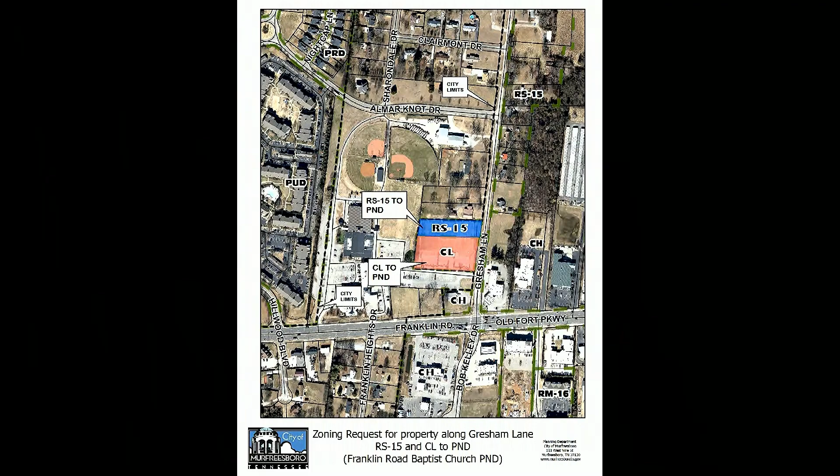Exceptions must be specifically identified and requested in the application for a planned development. The PND program book identifies 6 requested exemptions, including a light spillage exception on the north property line. This request is to allow light spillage into the residential property located to the north, which is in the unincorporated county currently. This property is owned by Franklin Road Baptist Church and is currently used for staff housing.

The north property line buffer requirement exception is requested to supersede the landscape screening and buffering requirements along the north property line that were established as a condition of the 2019 Board of Zoning Appeals special use permit. Franklin Road Baptist Church has purchased the property to the north and will be incorporating it as part of its campus.

A re-subdivision plat timing exception is requested to modify the BZA special use permit condition requiring recordation of a re-subdivision plat prior to the soccer field development. The applicant proposes to record the plat following the effective date of this rezoning request, if approved.

The lighting and amplification exception is requested to supersede the special use permit condition by the BZA prohibiting lighting and outdoor amplified sound at the soccer field. Approval of this rezoning would permit permanent field lighting and amplified sound.

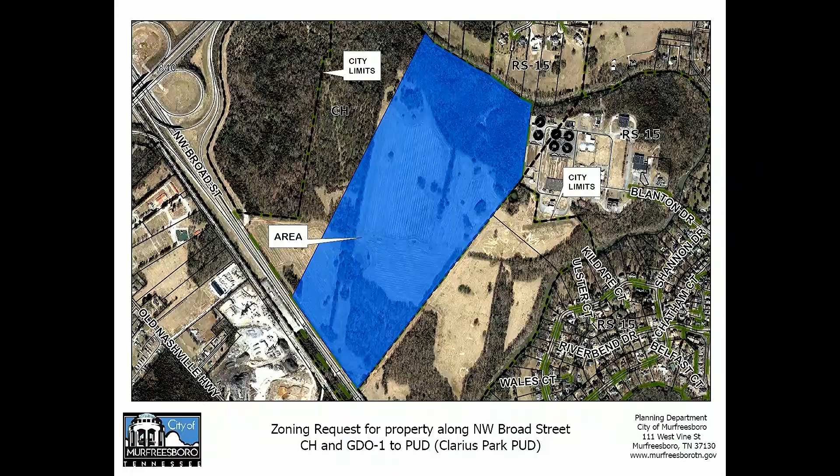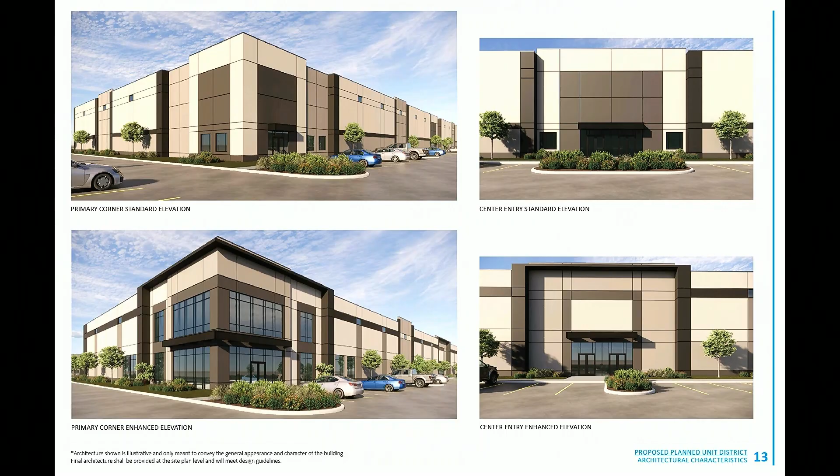Architectural standards are designed as shown here—it's tilt-up panel construction with glass at entry points and corners to help accent. The tilt-up panels will be of varying colors to break up the solid facade, and they also provide some offsets to create interest as required by our design guidelines.

Parking is provided on site. They don't have exact end users yet, so they've estimated to the best of their ability how many parking spaces will be necessary for this development, and have future plans of how they can expand parking if necessary by utilizing spaces on the existing property.

Our future land use map identifies this property as EG, employment generating. Let's see if I can get back to that map. There we go—as you can see, most of that property along Northwest Broad Street at that interchange is in the EG district.

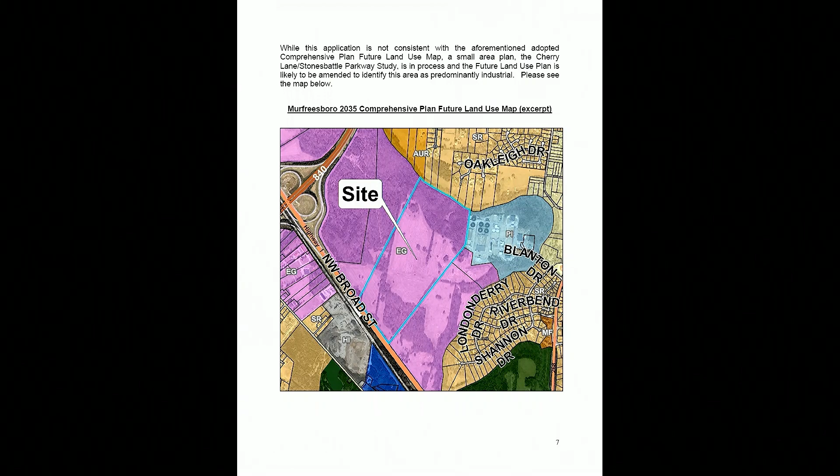While this application is not consistent with the current future land use map, a small area plan called the Cherry Lane Stonesbattle Parkway Study Area is currently in process, and the future land use map is likely to be amended to identify this area as predominantly industrial as a result of that study. So that area you're seeing here would most likely change to an industrial classification.

Staff is supportive of the zoning request for the following reasons. Again, while this application is not consistent with the current future land use map, the Cherry Lane Stonesbattle Parkway study is in process and is expected to identify this area as industrial use in the future. Also, the plan proposes an exceptional transition and buffer area adjacent to the residential use areas along the northern property line. This transition and buffer ranges between 600 and 800 feet from the nearest buildings to the residential property lines. Therefore, staff believes the plan is designed to be compatible with those adjacent residential uses.

The applicant will need to make a presentation as well tonight. After he is completed, the Planning Commission will need to conduct a public hearing before formulating a recommendation for our City Council. I believe Mr. Brian Grover is right here. Any questions for Mr. Barbie at this point? Okay, thank you.

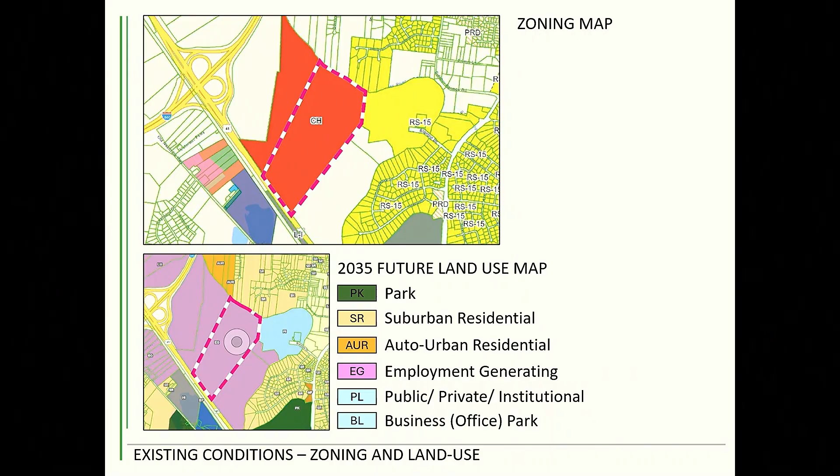As Mr. Barbie stated, this does not follow the current future land use map. However, upon further study that staff has been reviewing with the Cherry Lane Master Plan, industrial uses are being proposed for this section of Murfreesboro.

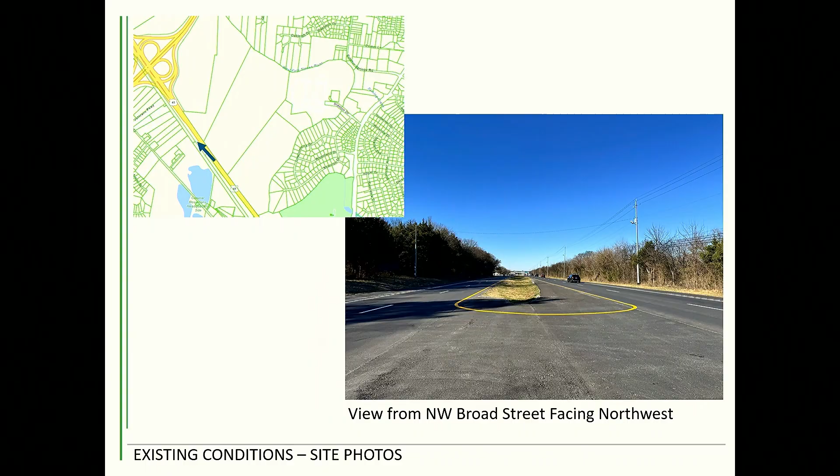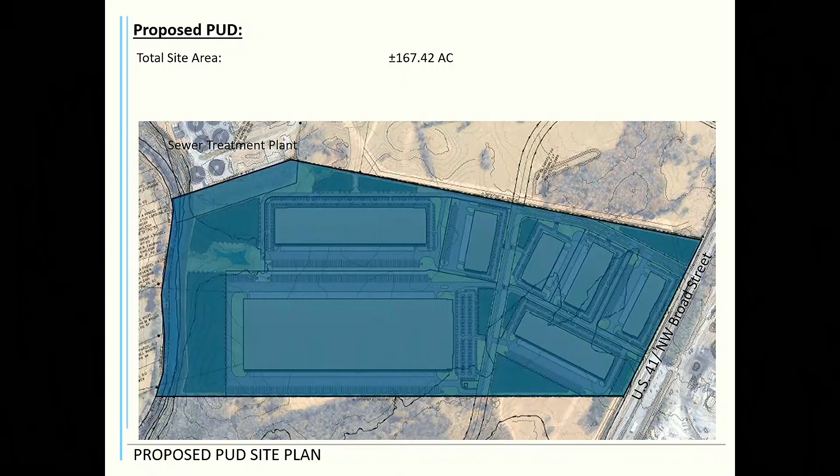The proposed PUD consists of approximately 167.5 acres, of which 5 would be donated towards the sewer treatment plant for their future expansion needs, as well as a little over 7 acres being dedicated towards internal right-of-way, leaving approximately 155 acres for the development.

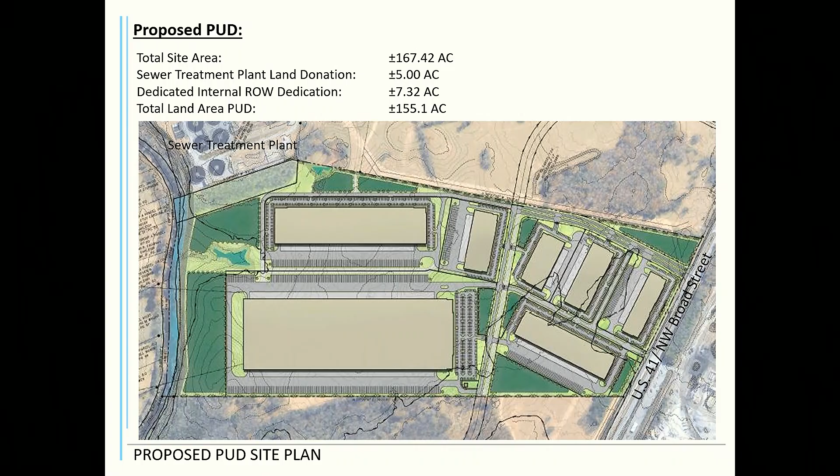The site would be accessed from 41 via two entrances. There is also a proposed 100-foot right-of-way for the east and western connection, which also has a connection going to 41 along the eastern portion of the property.

The property consists of 7 lots, which would house those 7 buildings, having a maximum square footage for the development around 2.1 million square feet.

The parking and trailer storage areas are around the site. On the northern portion of the site, the primary location of the trailer storage is located internally. That was upon discussions with the neighbors at the neighborhood meeting, who wanted to make sure that portion of the site would be internalized.

To mitigate any type of impact to the surrounding area, the southern portion of the development focuses the buildings towards the entryways and frontage along Broad Street to really address the streets.

The open space areas located in green here will also be housing the detention, which is those darker areas. The open space areas will also have the wetlands currently located on site, as well as the tree preservation area located along the Stones River.

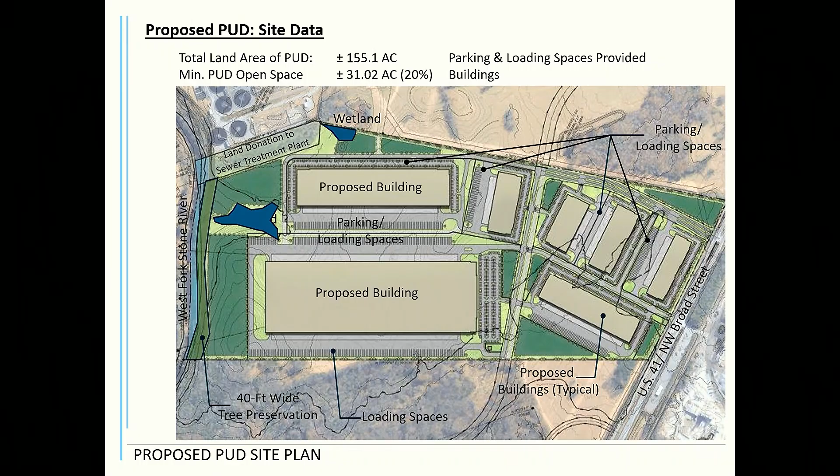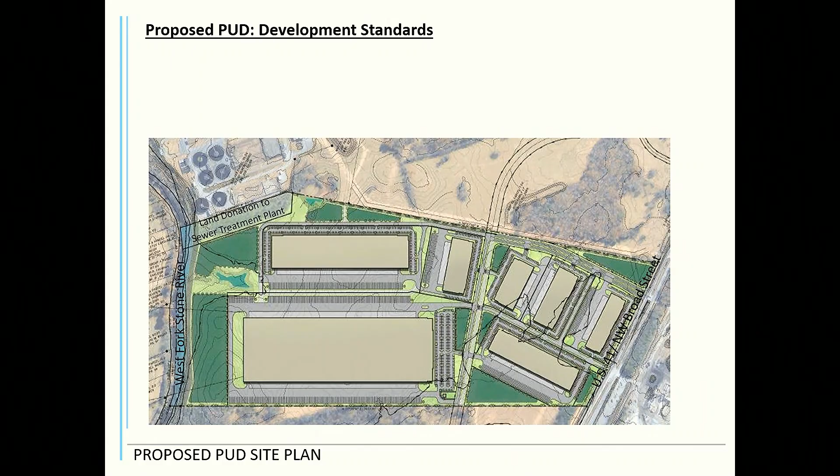Some key standards with this development, although not all of them: the trailer parking areas will be screened from Northwest Broad Street. All the entry points into the development, as well as internal intersections, will ensure proper turning and maneuvering throughout the site.

The development will be providing landscape buffers along the northern and southern portions. We'll also be providing enhanced landscaping along US 41 to help build up that curb appeal, as this is more of an entryway into Murfreesboro, either from 41 or off of 840.

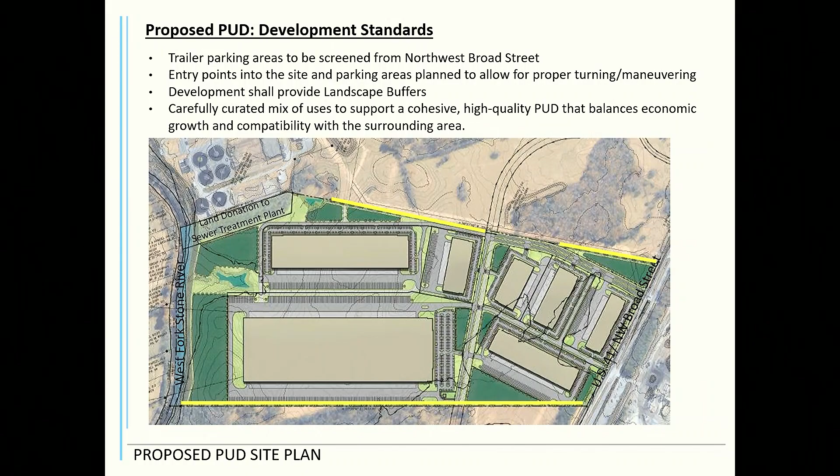Working with staff and some of the stakeholders, such as neighbors, we have developed this proposed use list that we still think will offer economic opportunities throughout Murfreesboro, as well as being compatible with the surrounding area.

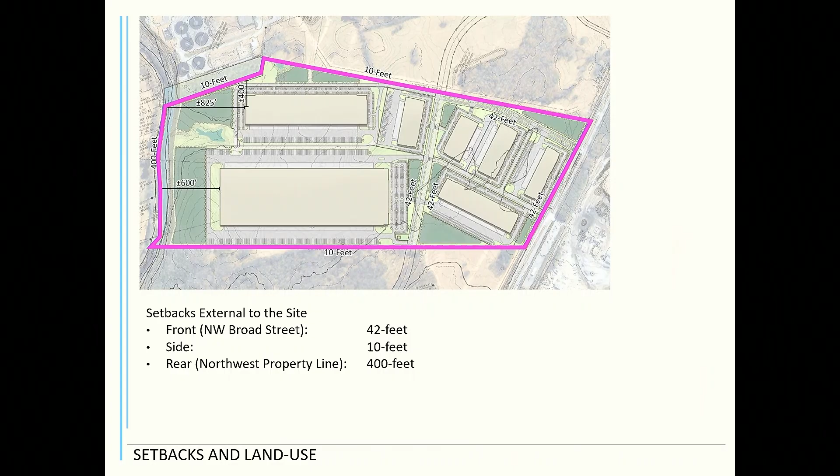When it comes to the setbacks for the site, the external setbacks along Northwest Broad Street would be 42 feet, with the sides being 10. However, the rear would be 400, which is significantly more than what we typically have for setbacks, but we want to make sure we have that separation from those residential units to the north.

The interior setbacks from the proposed right-of-ways would be 42 feet, and the proposed setbacks from the internal lot lines would be 42 from the front, as we do have some shared access areas on site, such as here, which would have that 42 feet, with 10 on the side and 20 on the rear.

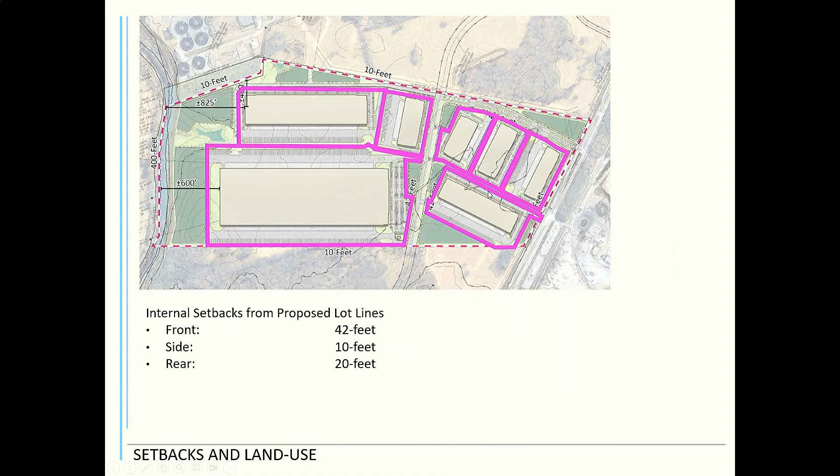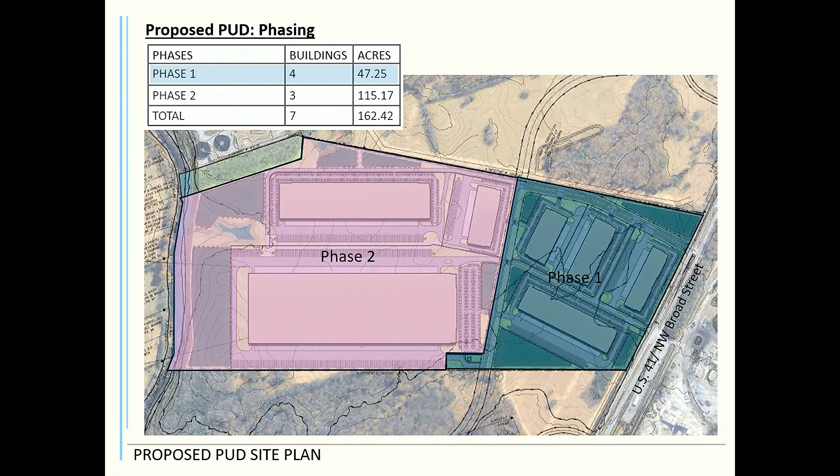This development will be built in 2 phases, with phase 1 consisting of 4 buildings and just under 50 acres, with the remainder being built in phase 2.

With phase 1, there are some infrastructure improvements being built along with this first portion, including a proposed pump station, as well as roadway improvements.

A traffic impact study has been completed, and you can find that on page 16 of the plan book. To summarize what that recommended: the southern entrance along Northwest Broad Street would be a signalized entrance with turn lanes both north and southbound along 41.

The traffic impact study also took into consideration future development. Although these turn lanes would not be technically warranted with our development, they would be warranted in the future at some point. So rather than having dedicated right-of-way figured out later on, we wanted to include that within the dedication for right-of-way now, so those improvements could be made by others as they're warranted later down the road.

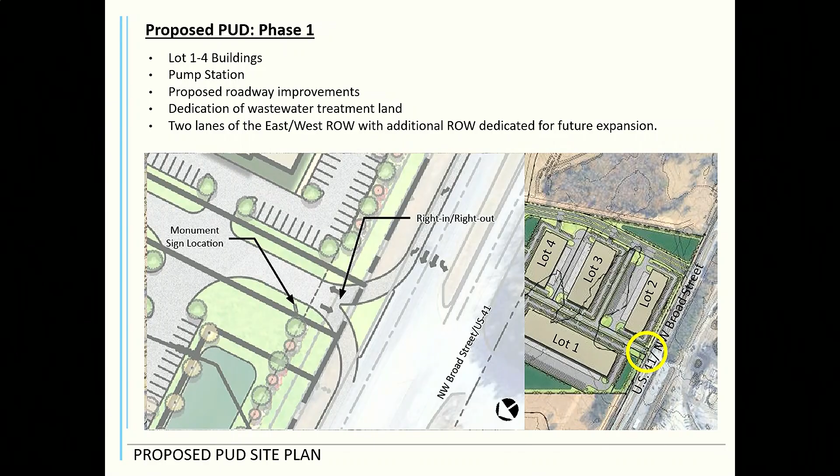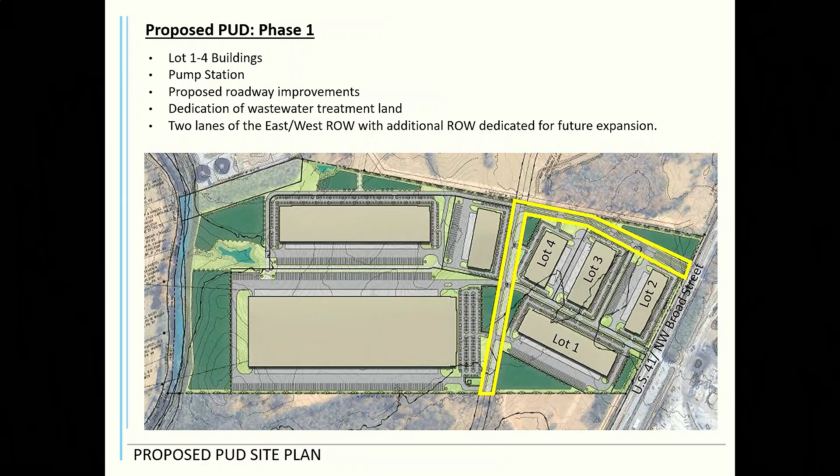The northern entrance would be a right in and right out, and would include a dedicated right turn lane when northbound on US 41. With phase 1, we also have that dedication for the wastewater area, as well as the right-of-way. With this right-of-way on the north to the east-west connection, we would also be providing 2 lanes within that 100-foot right-of-way. The buildings would not exceed 75 feet in height.

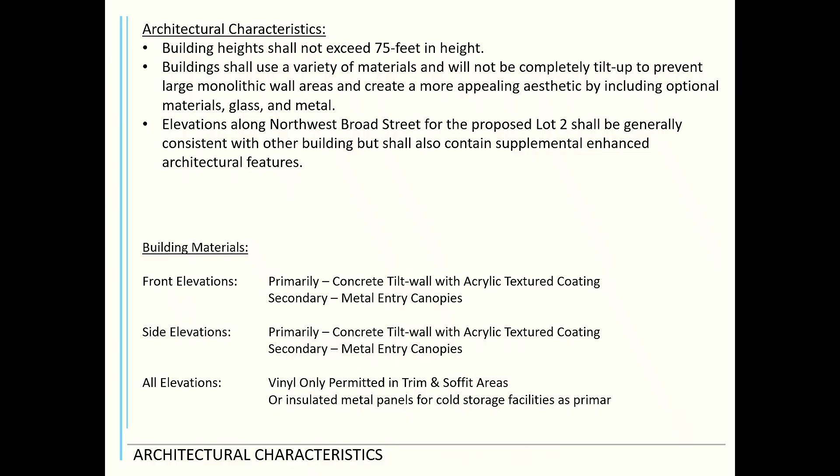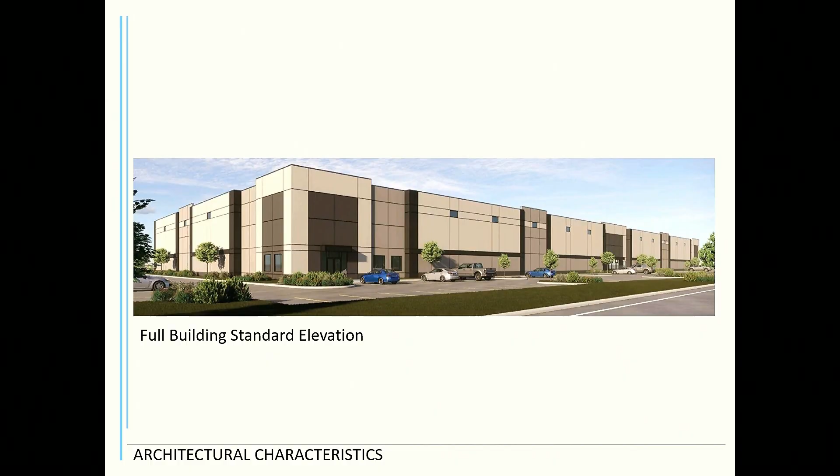They would be using a variety of materials, as well as different points with their facades coming in and out to break up that monolithic look. However, Lot 2, as it fronts Northwest Broad Street, would incorporate some enhanced elevations. So this is a typical elevation for the development, but then the Lot 2 building would incorporate enhancements such as this.

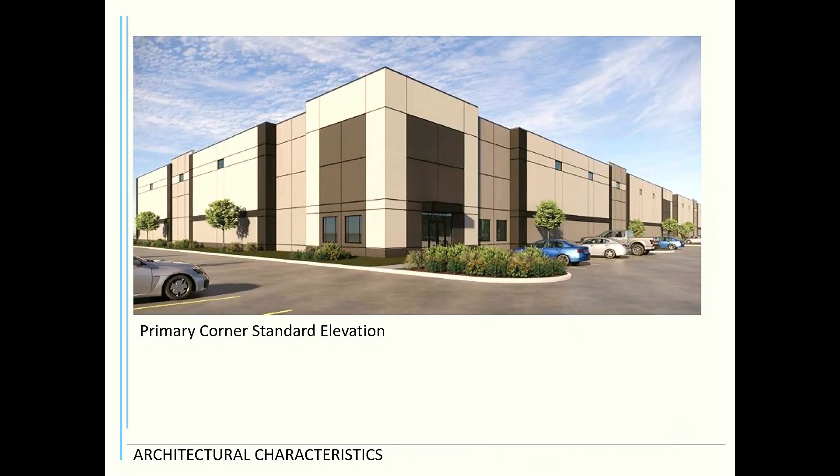Typical corner approach for the development of the buildings, and this is the enhanced elevation for those corners on Lot 2, with center entryways, once again enhanced for that Lot 2 building facing Northwest Broad Street.

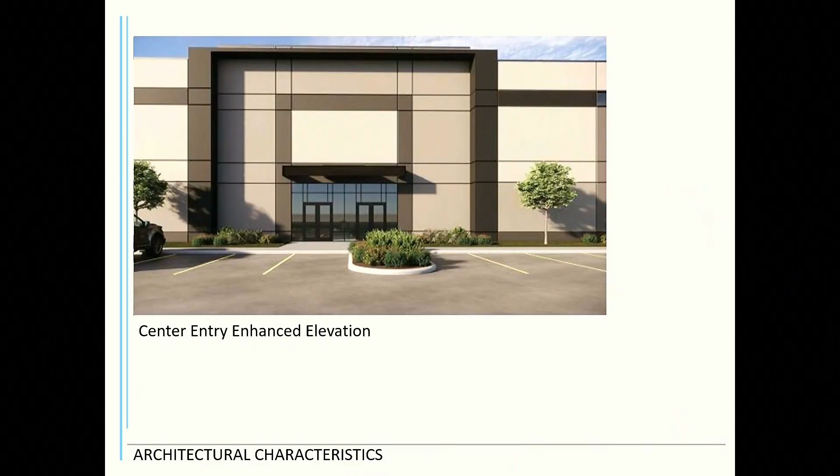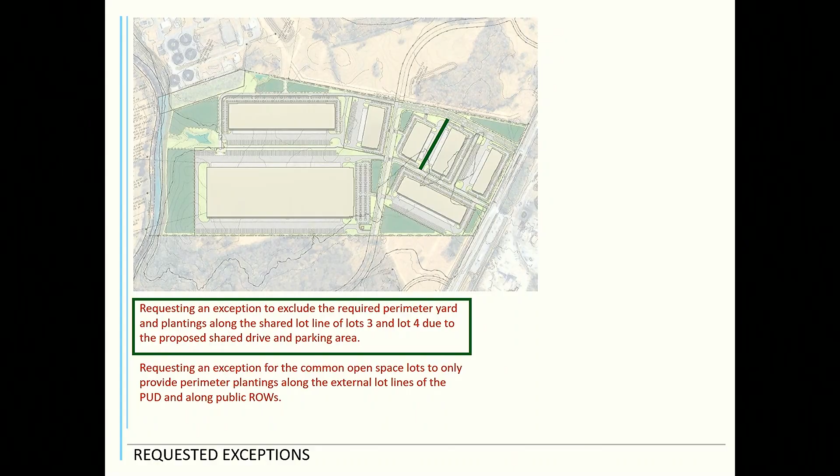The first is that the required perimeter yard and plantings between Lot 3 and 4 are excluded, as there's currently a proposed shared drive between those areas. We also request an exception that the common open space lots provide the perimeter plantings along external lot lines and right-of-ways only.

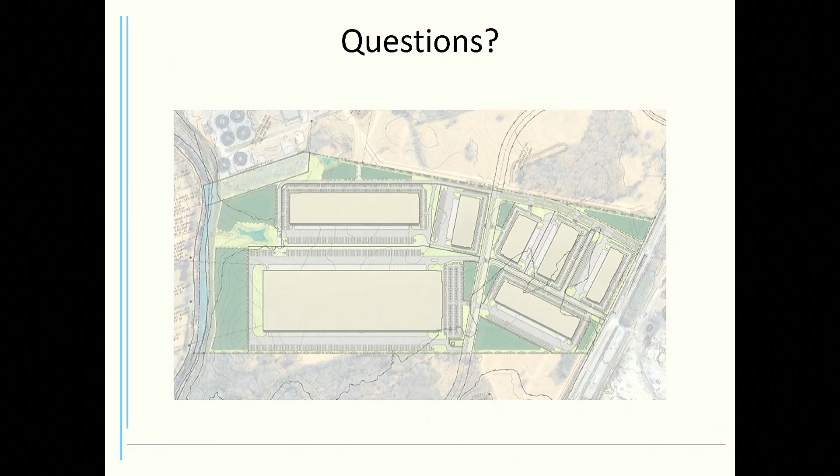If you have any questions, I'd be more than happy to answer those now or after the public hearing. Any questions?

Thank you. Thank you.

All right, we will open the public hearing associated with this application. Is anyone here that would like to speak for or against this application? All right, seeing no one, we will close the public hearing.

Any questions for staff or the applicant associated with this application? And if not, what action do you want to take?

Move for approval, subject to staff comments. Second. Have a motion and a second. Mr. Carroll, aye. Mr. Prince, aye. Mr. Rollins, aye. Mr. Wright, aye. Chair Halliburton, aye.

Next item on our agenda is the zoning application for approximately 1.37 acres located along Rushwood Drive to be rezoned from Office General and RS8 to PCD, Planned Commercial District, Bellwood Office Park PCD.

Wayne Belt is the applicant. Good afternoon, Chairman Halliburton and members of the Planning Commission. This application before you is a request to rezone 1.37 acres located along Rushwood Drive, to be rezoned from Office General and Residential Single Family 8 to Planned Commercial District, the Bellwood Office Park Planned Commercial District.

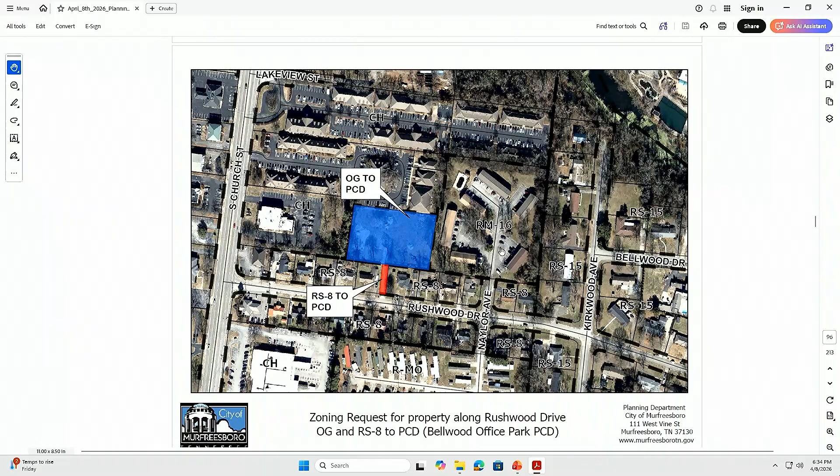The remainder of the property would have perimeter planting yards, base of building landscaping per our zoning ordinance.

There is a slight differentiation. The RS8 portion where the driveway goes through would have hedgerows on each side to help provide some screening without overgrowing that area and causing obstruction to the drive.

The main parcel located in this request is recommended to be developed, by our future land use map, as BP Business Park. Land character as such, with recommended zoning districts of Office General Residential, Commercial, Planned Commercial District, or Planned Institutional Development.

Staff is supportive of the zoning request as described above for the following reasons: the request is consistent with the recommendations of the Murfreesboro 2035 Comprehensive Plan. Landscape buffers will be provided to mitigate any potential negative impacts to the neighboring properties. And uses will be primarily daytime-oriented, so as to minimize any intrusion on adjacent residential uses.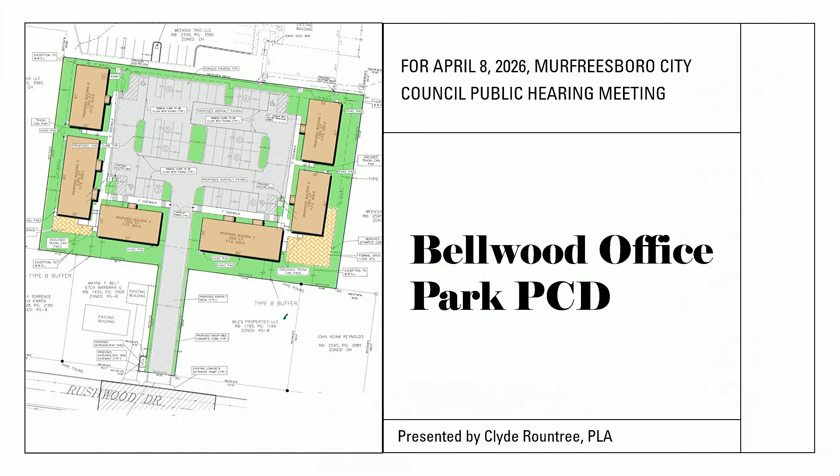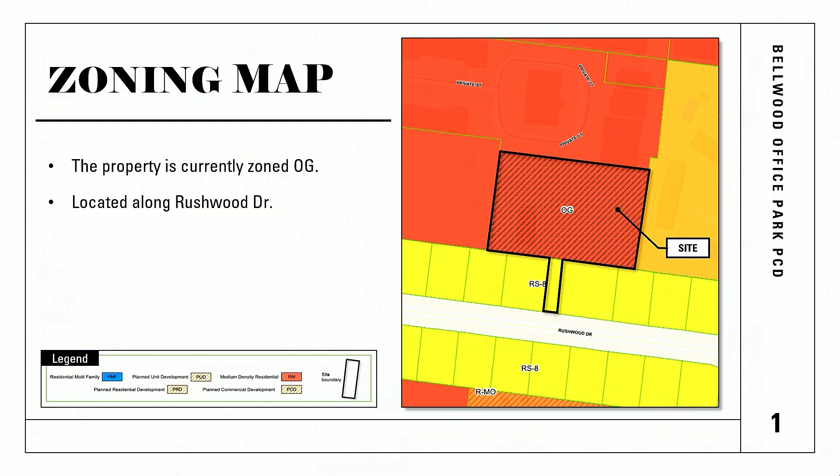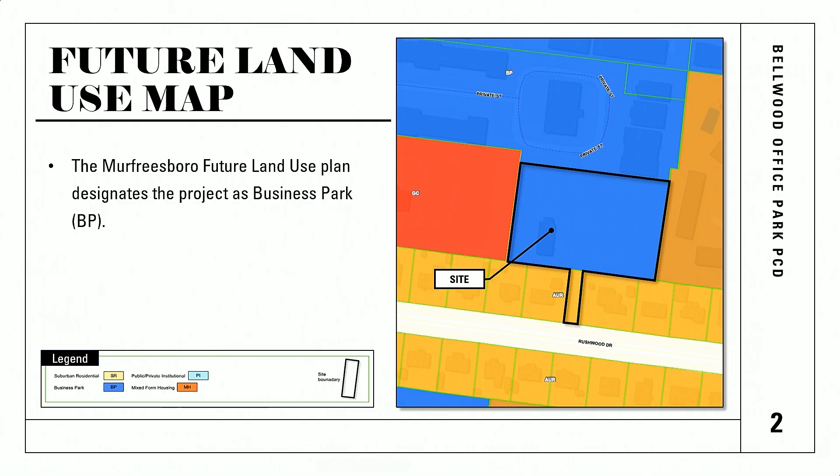I'll just go through real briefly, don't want to be too redundant with Brad's work, but it is currently zoned Office General, and there's a little portion zoned RS8, that little finger goes down to Rushwood Drive. That'll be our access point to this piece of property. And as mentioned, the 2035 plan calls out the business park, and we are consistent with the 2035 plan, so that is a positive, and we're positive in that direction.

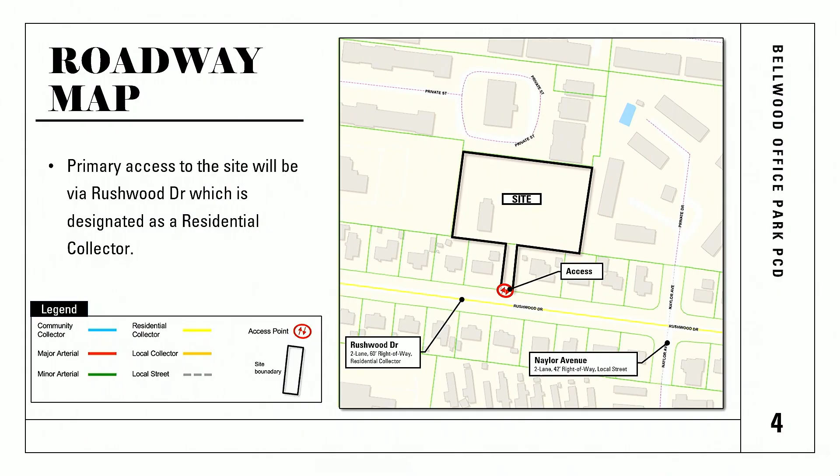As far as utilities, all the utilities will be coming from Rushwood Drive up into the property, and our primary access point will be Rushwood Drive as well. Adjacent uses, as Brad mentioned, to the north is the Jefferson Square Office Park, to the west is a current commercial building as well. And then there's single-family residential to the south, and then there's an apartment complex to the east.

Overall, the site plan has 6 buildings, as Brad mentioned. We have 2 areas of formal open space associated with the development. All the development will be inward-facing towards the parking lot. The parking was required to have 43 spaces. We're able to meet that expectation. Our 43 spaces, we provided 44.

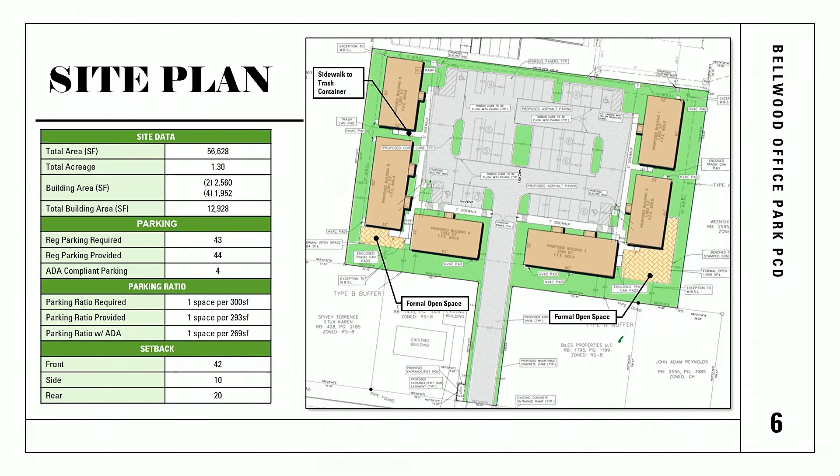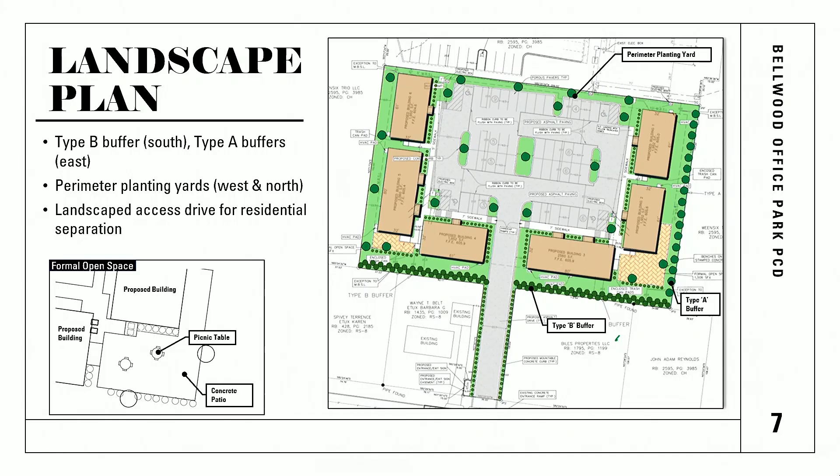As well as a formal open space, and it is definitely 2 different size buildings, one being approximately 1,900 square feet, and the other approximately 2,500 square feet. And there's a 42-foot front setback, a 10-foot side setback, and a 20-foot rear setback within that area. As Brad mentioned, the buffers that we're asking for is a Type B buffer along the residential to the south, and then where the apartments are, a Type A buffer to the east.

The key working with Mr. Belt on this was really about the uses. We wanted to make sure that the uses were consistent with both Jefferson Square and also with the neighborhood. We didn't want to encourage any kind of uses that are after-hour uses. So we spent time to walk through all the different approved uses in commercial zones and really narrowed that down to what we felt like was very consistent with the expectations for the development, and really trying to be sensitive to the adjacent neighborhood as well as being sensitive to the Jefferson Square development.

As I mentioned, it's a brief presentation. I'm here for any questions you may have regarding the project. Architecturally, just want to let you know that we are going exactly the same architecture as at Jefferson Square, all masonry buildings, all single-story buildings, and they'll not exceed 25 feet, so we wanted to be consistent, again, with the character that's already being presented at Jefferson Square.

So if you have any questions, I'm available right now to answer any questions you may have. You'll have a chance to speak in the public hearing. Any questions from the commission associated with Mr. Rountree at this point? I have one question. Sure.

What was the thought process on connecting Rushwood Drive as the entrance instead of connecting to Jefferson Square? There's a lot of history behind that, and I'd probably like to ask Mr. Belt to kind of communicate towards that, because I don't know exactly all the different parameters, but I know it was something that was recommended from the planning staff, and that goes back to some history. So he's going to speak during the public component, and he'll answer that question.

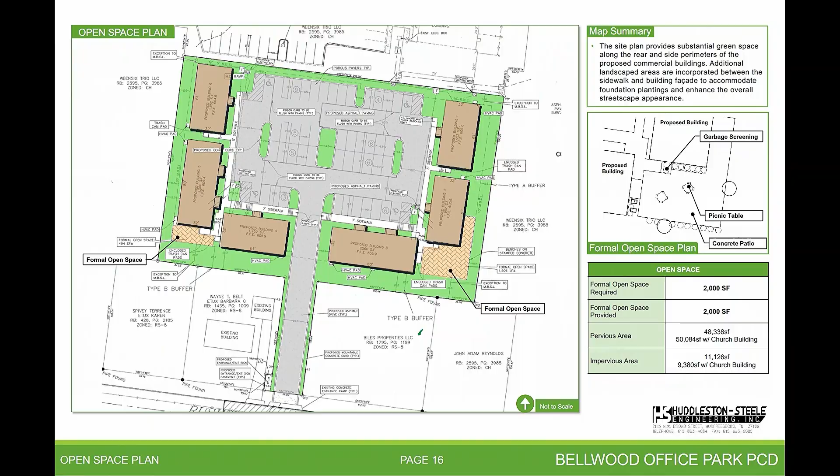I can jump in and give a little further context, Mr. Belt. Sir? Mr. Belt, I could give a little more context perhaps to what Mr. Belt raised about the access on Jefferson Square versus this driveway. There has been, I don't know exactly how long, but several years of litigation between Mr. Belt, the city, and an individual owner at Jefferson Square - not the Owners Association, I apologize - regarding the rights to access.

Regarding the ability of this parcel to access through Jefferson Square or not, that litigation, as I understand it, is ongoing. There are some appeals being pursued right now, but the hope is that by taking access off of Rushwood rather than through Jefferson Square, that might hopefully make some of that litigation moot, so there's no need to further pursue it. So the reason, ultimately, for the access through the driveway is because there is a question of the entitlement to access through Jefferson Square.

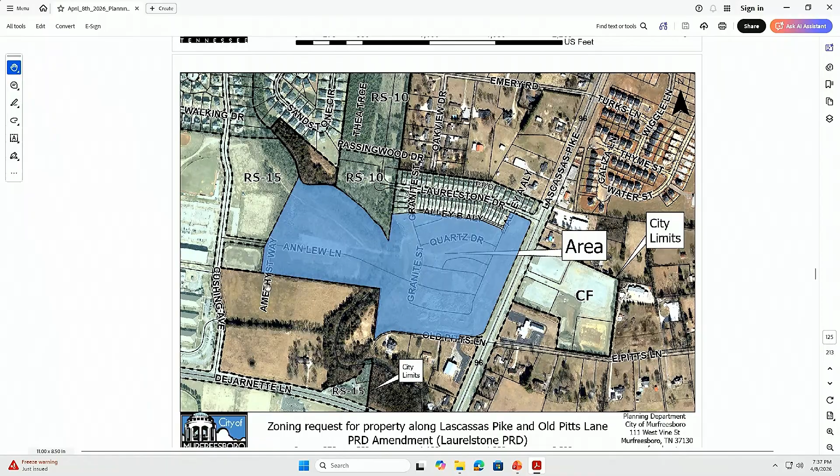As you can see on the above screen, the next project for this zoning application is a zoning amendment. The existing area is located here off of Lascassas Pike, along the easterly boundary. Phase 1 of the original Laurelstone project has already been constructed, and they're looking at finishing up the remainder of the project site, but have requested not continuing with the cabana, villas, and cottage product types, instead having the remainder of the entire project be single-family detached homes.

Comparing the two together, the approved project has a total of 186 residential units; 184 is the proposal. They would go from keeping only 30 villa units and 23 cottage units, which are townhomes, to having 99 41-foot wide single-family lots on the easterly side of Bushman Creek, and on the westerly side, 32 single-family detached units on 52-foot wide lots. The main difference in lot sizes: the currently approved plan has 6,500 square foot single-family lots; the new lots would be 5,330 square foot minimums for the 41-foot wide lots and 6,760 square feet for the 52-foot wide lots.

As we look at particular projects, there are a couple key pages we always review. One is our general plan, and looking at this property, it's designated AUR. Looking at those AUR policies in place today, it is consistent with those particular uses. There was a neighborhood meeting for the project that was very well attended, mostly by existing residents of the Laurelstone project that has been built. The developers will probably come up and talk a little more about their amenity package.

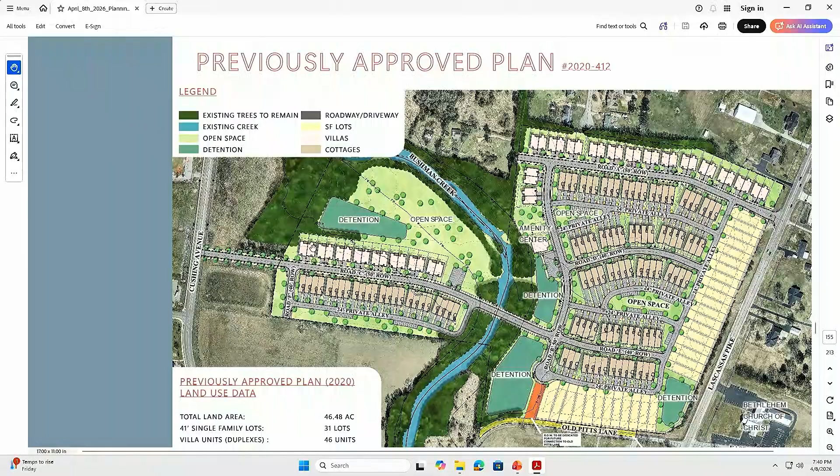With the new proposed amendment, you don't have any more of those duplex or townhome units, but all of these units are your 41-foot wide lots. And here on Lascassas, you no longer have front doors accessing the front, but a landscape buffer along that frontage road. The same thing here, there's landscaping on the back side, and those houses will face inward. Part of their phasing, there's that second section that has really a little bit larger lots.

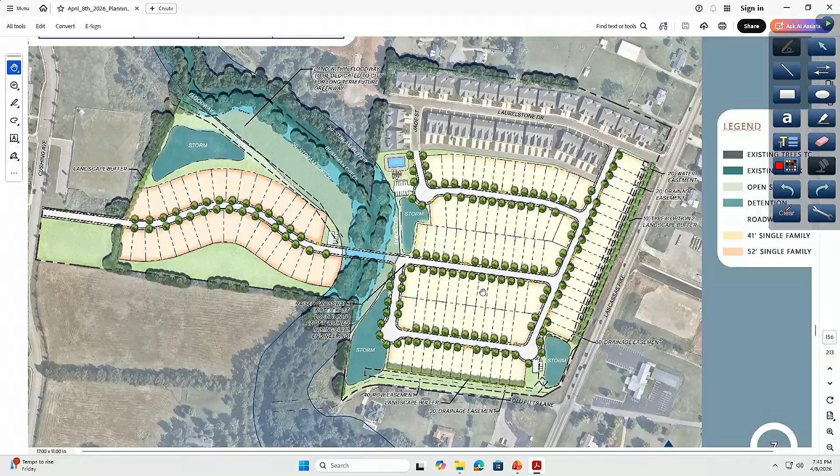Of other note is your Bushman Creek. As staff looked at the project, it's actually in our greenways, blueways, bikeways plan as a future connection further up to Stones River, further to the north. So as we talked to the applicant, because most of those areas are in the floodway, they have agreed to dedicate to the city those areas within the floodway, which will allow the city, when we are ready in our long-range plan, to build out those greenways, to have the land, but then be able to flex which side of the creek and where the crossings are for pedestrian bridges and the like for that particular project.

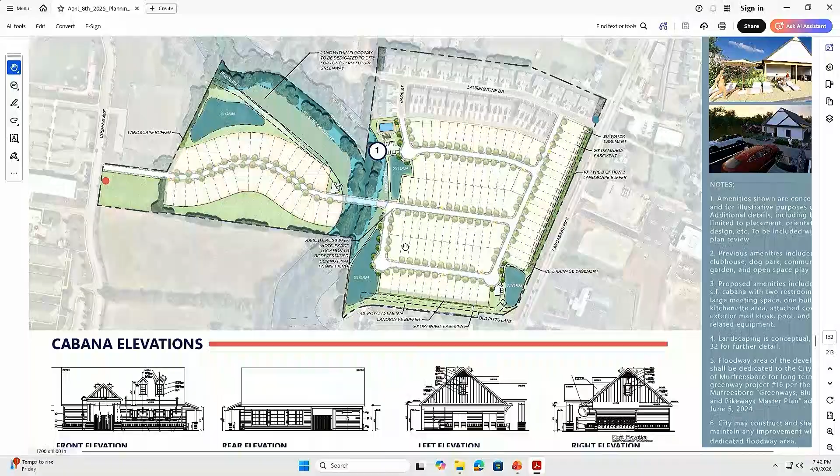Last but not least, before we get into the presentation, this is the screenshot that the applicant will be going through a little bit more on the amenity package.

So last thing, with that AUR, the density for it is 3.83 units to the acre. This particular project in the new layout is actually within those limits of the AUR zone district.

We do have a couple of modifications that are requested in the staff report for the pattern book that I believe the applicant is up for, a couple of tweaks to the architecture for some of those side and enhanced elevation sections, and then really just some clarifying grammatical issues, and they do not have any exceptions that they're requesting with this pattern book.

So with that, I'll turn it over to — he's moved sides — Tony, to go over the amenities package, because I'm sure that's one of the things that the neighbors are most interested on.

Good evening, members of the Planning Commission. My name is Tony Wyman. I'm with Goodall Homes, Clayton Properties Group. I just wanted my comments very brief and to provide a couple of comments related to background on the project.

On the opening page of the staff report, there's a clarification I'd like to make that indicates we decided to seek the PRD amendment because of a different product type. We no longer offer villas or cottages, and that was really the genesis of the switch to single-family detached.

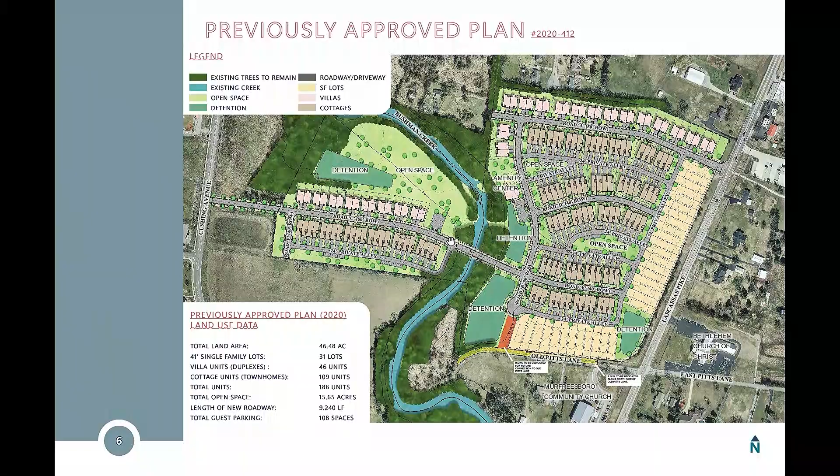Also, in the previously approved plan, you can see there is a connection, a public roadway connection from Laurelstone Drive south to the street that will go across the creek to Cushing Avenue. What was done there to mitigate the amount of traffic on Laurelstone Drive was that public street was cut off right at the amenity center, so traffic coming from the west would be forced to go up very close to Lascassas Pike without placing much additional traffic on the existing residents of Laurelstone Drive.

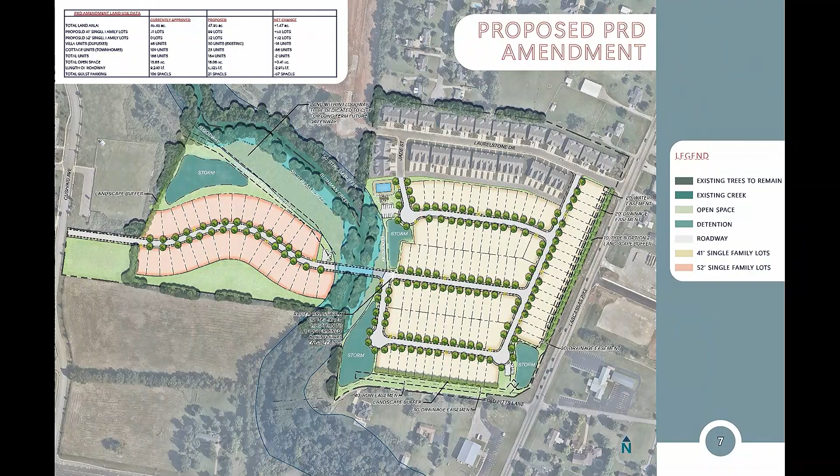Regarding parking, they have provided a couple of small guest parking areas, but one of the main differences between Section 1 and the future sections they are proposing now is that Section 1 had much shallower driveways. The front setback is 25 feet, I believe, for the existing Section 1, which would only accommodate 2 cars in the driveway. What they are proposing with this amendment is a 35-foot setback for all of the proposed houses, which will accommodate 4 parking spaces in the driveway.

So, much like our standard RS10, RS12 setbacks, with a requirement for 4 parking spaces in the driveway. I think that's one of the reasons why we as staff felt comfortable with the amount of guest parking provided, because they're providing more on-site parking on the individual lots for these houses than on the existing houses.

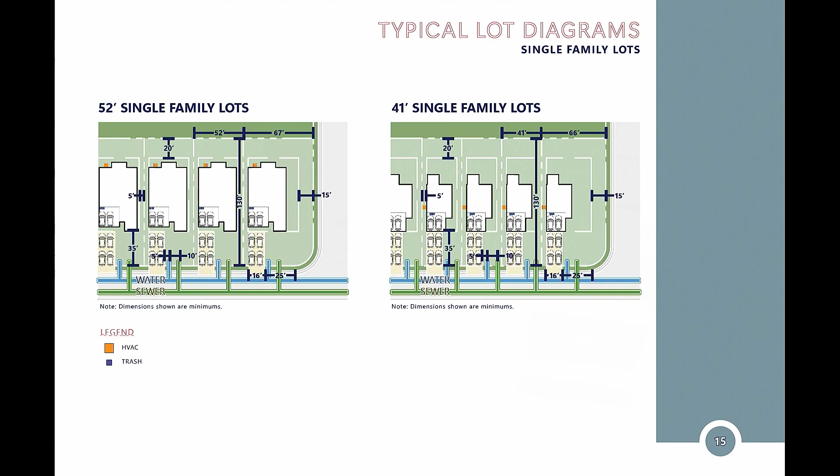So, Ms. Smith, can you address the discrepancies between what the Homeowners Association is expressing concerns about and what's in the pattern book? Yeah, so if we look at the existing pattern book, which is also included in today's packet, there is an amenity page. Here you can see a summary of all of the particular amenities on the project site.

They were still very much in this same area, but it included several detention ponds, which is just green space, most of which had to continue. But you'll see a small dog park, community garden, the clubhouse component, and then some open space in these areas. Here was a picture of what that anticipated clubhouse might look like, and the backside of the clubhouse, but it did not include a pool.

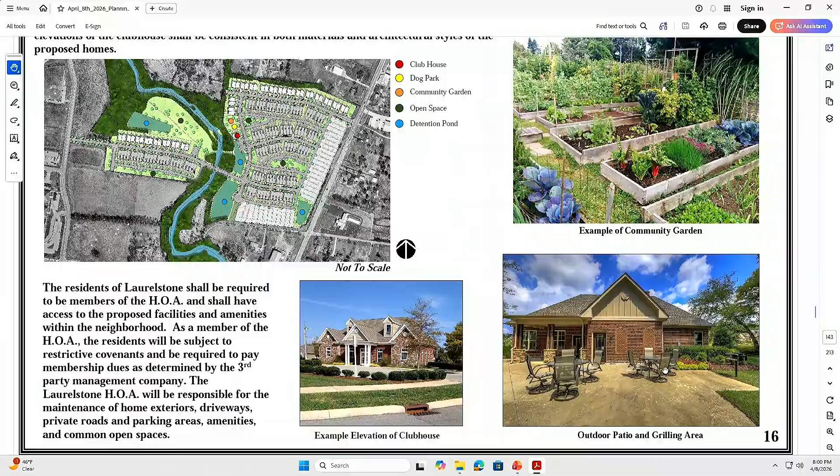So they've added the pool, they've subtracted the dog park, and the clubhouse, depending on how you define it. I didn't go into too much detail in the staff report, but in the new amenity page it summarizes this.

Recall that the program book, when it's adopted, everything listed in this program book is their zoning and what is required. Here they specified how long this amenity building would be in size, which the prior version did not. I would say this is probably at least the same size as what was in the prior book at 2,500 square feet. But it says cabana with 2 restrooms, large meeting space, 1 built-in kitchenette area, attached covered exterior mail kiosk, pool, and pool-related equipment.

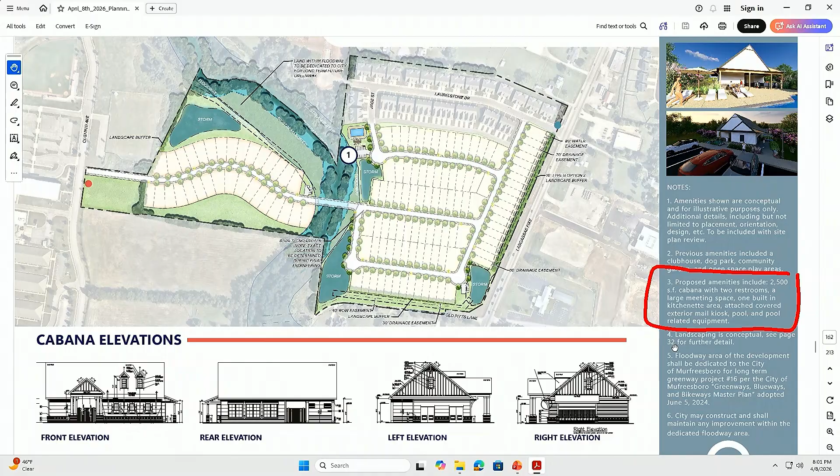So there you can kind of see how the 2 areas change. They are different, but they are still active recreation areas. Usually what we look at for a PRD is how many people are going to be in that PRD, and whether the facilities are large enough for how many people are going to be in that whole PRD.

One thing we had not known last time we were here setting the public hearing is how we wanted to treat this area within their property line, and it's hard to see where those lines are. Some of them are very close to the creek on the north side, but some of it does waver back and forth. We did reach out to our Parks and Rec department, because in the past, if it's in one of our long-range plans, similar to our major transportation plan, if it says we want these future widenings because development in total needs these improvements, they did the same thing on the greenways, blueways, bikeways. The community needs those kinds of things.

The difficult part is it was not in the near term. In the long term, it had it as a $6.6 million project because it goes quite far north, like all the way up towards DeJarnette. So their issue is we don't want to put a structure in place that later on we may have to say, oh, we need it on the other side of the creek, or we need to hold it here and then shift it to the other side.

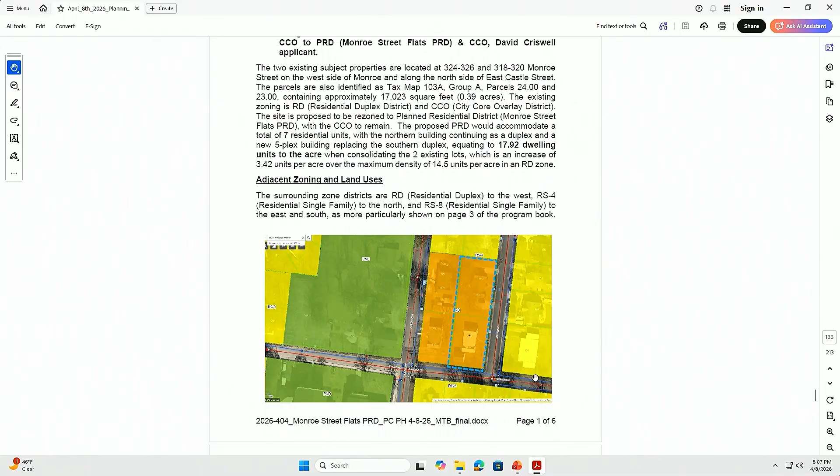This particular project is located in a currently RD zoned area, and that RD zoning actually straddles not just these two parcels, but the parcels directly to the west. However, when we look at the land use map, it does something a little different, and it splits that zone between SR use, which is usually single-family residential, and MH, our mixed-form housing, which a lot of the CCO has.

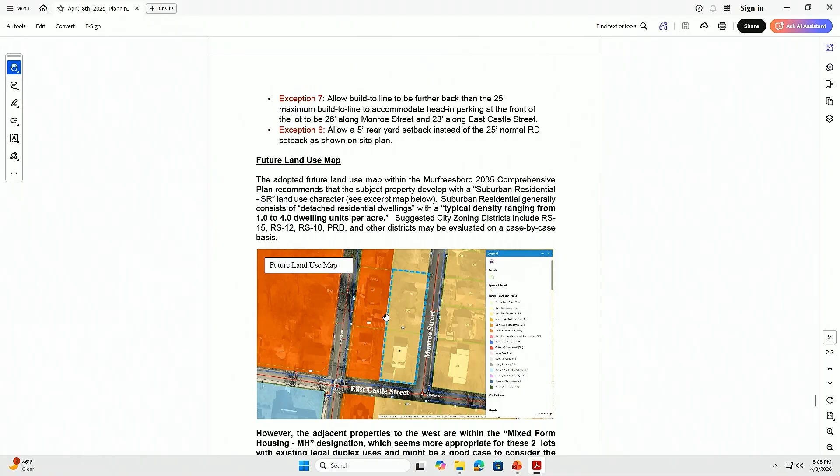Looking at this particular block, you'll notice these are very narrow lots as far as depth, and this block is different than anything in the SR, which tends to have far deeper lots. Because of that context, staff believes applying the mixed form housing designation as part of our transition policy is very appropriate in this instance.

You may recall this went back to our December joint conceptual workshop—I think our second workshop last year—which gave council an opportunity to weigh in on Mr. Criswell's application to consider leaving the duplex on the northerly portion of the site in place, demolishing the southerly duplex that's in very rough shape, to create 5 units of affordable apartment type housing.

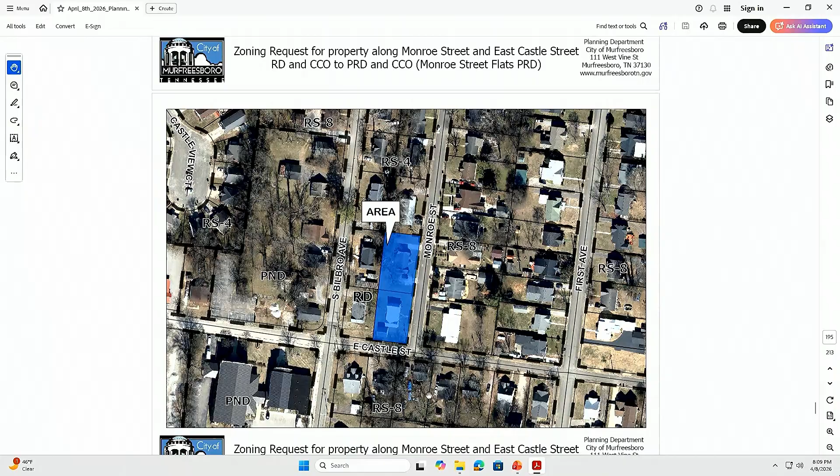As we've worked through that project with the applicant, we looked at the comparative district of RD because it is surrounded by RD-related properties. As you can see here, there are RD-type duplexes along all sides directly adjacent to the project site, and it's only across the street on Monroe that you have RS8, and to the south that RS8.

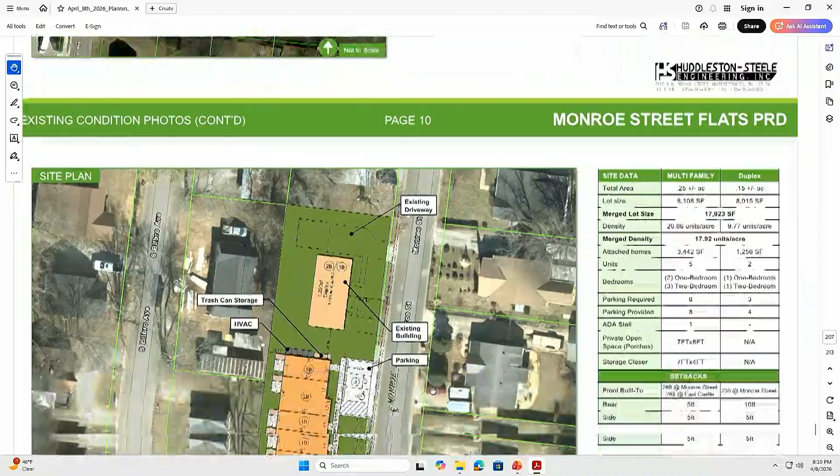Looking at the program book, I've been talking with the applicant and the applicant's engineer. There were a couple of last minute things—normally we wouldn't provide city trash services for a commercial use, but they'd like that. Staff reached out to our refuse department, and they said they could service it, but would need appropriate space along the frontage for 3-foot separation between cans and a continuous pad, so when the tongs pick them up they land flat and don't wobble on grass and fall into the street.

This was maybe one location staff considered, though talking to Mr. Criswell, he asked whether it would be a problem to put the trash cans in this location and roll them out closer to this area instead of between these. I said as long as folks have an access way from their unit down a solid pathway to get to their trash cans, and someone rolls them out to the street, we have that flexibility.

The main concern is we already have 5 HVAC units here, so we want appropriate spacing since the building is only 32 feet deep. There also needs to be a location for the mail kiosk that doesn't conflict with the trash. The applicant is more than willing to work on those things, but with spring break, we haven't always been able to connect with people on the same day.

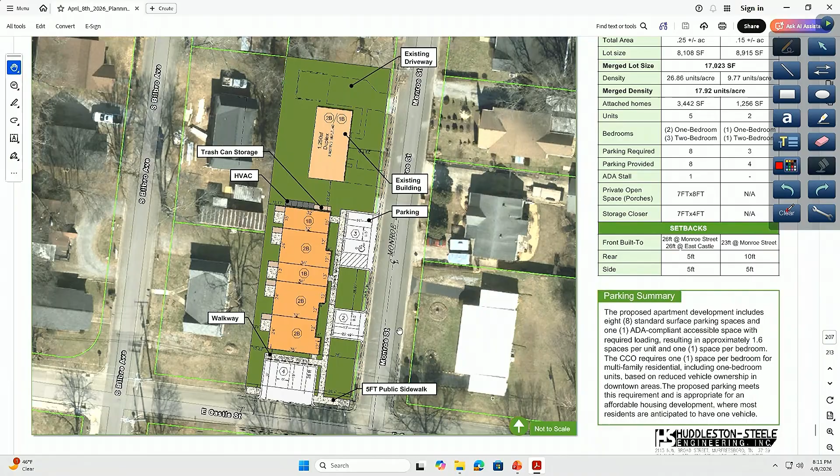The applicant does have a presentation they'd like to present, but staff is supportive of the zoning request as stated, because it removes an existing dilapidated duplex and provides mixed form housing that looks similar to the neighborhood—designed to resemble a single family detached home—in support of more affordable housing opportunities with smaller apartments. The residential use also seems compatible with surrounding adjacent land uses.

So with that, I will ask Mr. Rountree, who I believe is coming up to make a presentation on the project. Thank you, Holly.

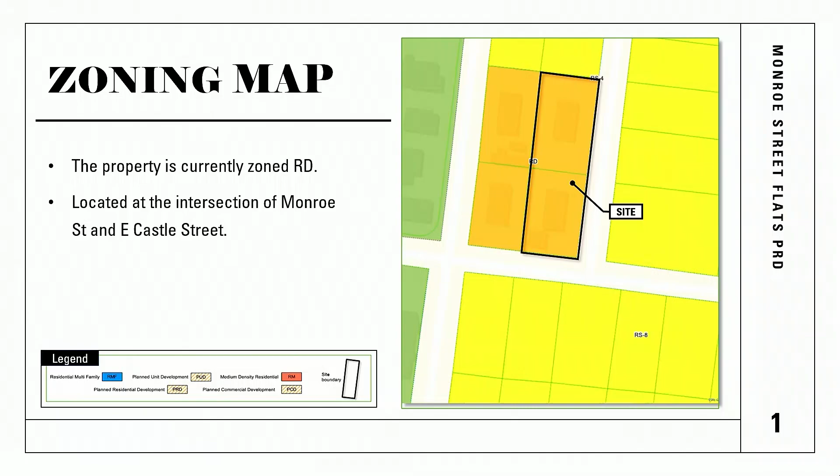Chairman Halliburton, Planning Commissioners, thank you for the opportunity to talk to you about the Monroe Street Flats project. This has been a real interesting one for us, and I'll just hit the highlights because I know we're all tired.

David owns a lot of property downtown and has been very active in redevelopment projects, taking advantage of the CCO, which has been an incredible tool for catalyzing development downtown. This is one of those projects where we've come up with a great solution for affordable housing, which is something David is passionate about. He has other properties downtown where he's helped people who need a lower income home, and he's had great retention with his tenants.

This particular lot's important because there's an existing home on there now that's been a long-term tenant, and this has been a long time coming. David's wanted to get this piece of property updated for a while, but he's been waiting for the man who lives there currently to move on, and that man has moved on. So finally he has the opportunity to create some new construction.

We feel excited about it because it's 5 units: 3 two-bedroom units and 2 one-bedroom units, with a nice little back patio area with a storage component. We feel it's going to be affordable housing but it's going to look really nice. David's been very committed. We've wrestled with parking and moved it to both the side of the building along Castle Street and in the front along Monroe Street. That was all for aesthetics, to make it look residential.

One of the exceptions we're asking for is the city standard 7-foot sidewalk in front of the house. We asked for a 5-foot sidewalk because we feel that's more appropriate for a residential look, and we'll have some wheel stops on the parking. All of this has been an effort to make it look very appropriate for the area, and I think if you drove by, you would have no idea it was affordable housing. That was really the goal.

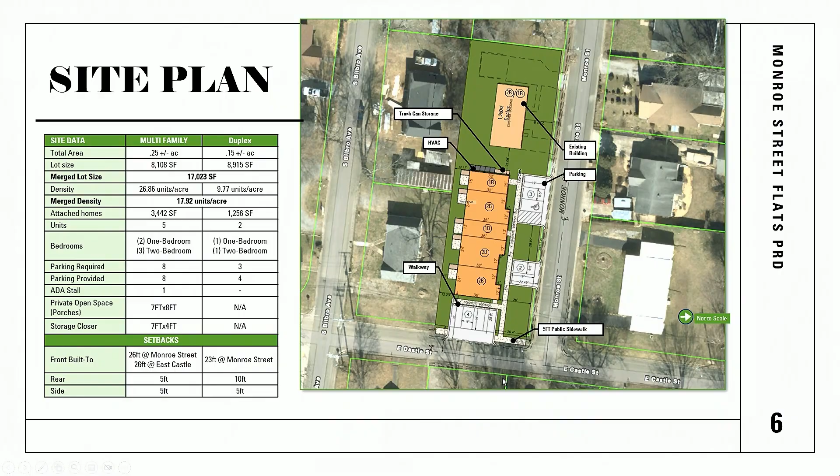Architecturally, I'm not sure if we've got it shown in detail, but I think it's in your pattern book. As was mentioned, we have one large building that is basically the 5 units. There are 3 doors total - 2 doors facing the street on Monroe, and 1 door facing the street on Castle. Again, that was to make sure it didn't look like a bunch of doors going into this building, to kind of disguise the fact that it has a lower income affordable housing component.

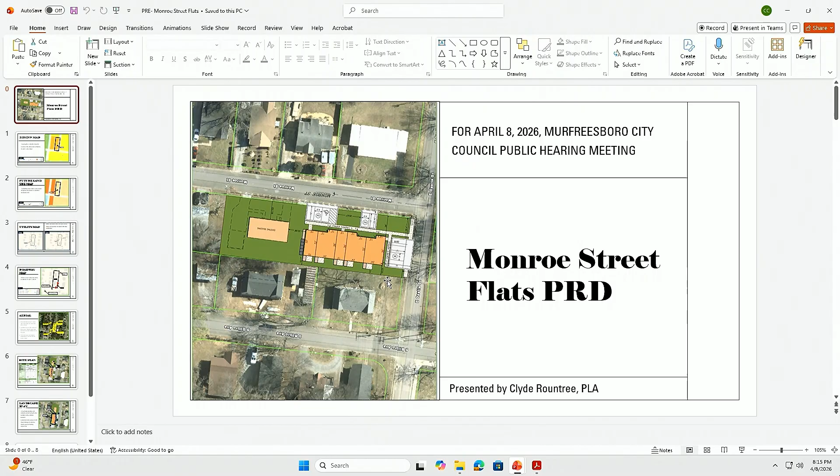So all that being said, we're excited about it. David's done a great job, he's been great to work with, he's passionate about it. He realizes, and we realize, that there are circumstances around this that aren't ideal. As Holly mentioned, the lot's very narrow.

So it really forced the geometry of the building, but at the same time, by having a larger front facade, we feel it's made it look more like a really nice single-family home. We were able to keep it as a duplex on the property in order to help reduce the overall density of the development. Dave's been a great owner, had great tenure with his tenants, and we feel this is a need within the downtown area. So we're excited about presenting you Monroe Street Flats.

I'm available for any questions. Mr. Criswell here is available as well. But thank you for hearing our presentation.